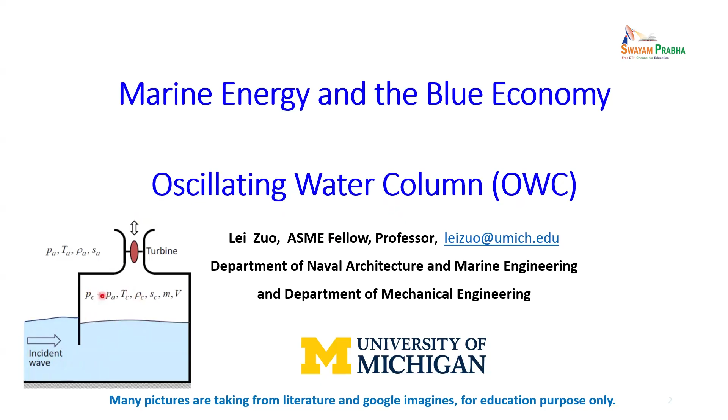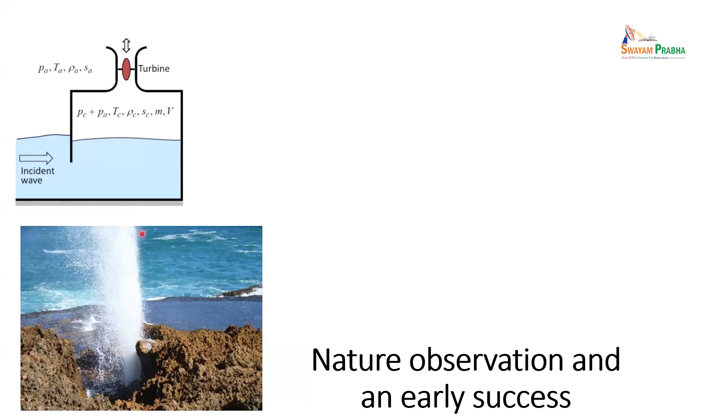That comes from nature observation. For example, in some coastal zones, a wave comes in and the water quickly comes up like that, right? So instead of getting water, you put a turbine here. Actually that is also one of the first applications: in the 1940s a Japanese researcher used that to power a lighthouse. Take a look at how it works here.

The wave moves up and down, right? Then it drives the air out, in that direction. Follow my mouse. If this water surface moves down, this valve opens, and air goes through here. No matter whether the water surface moves up or down, the air goes through the turbine in one direction. This way, reliability has been greatly increased. They can use this as a lighthouse power provider

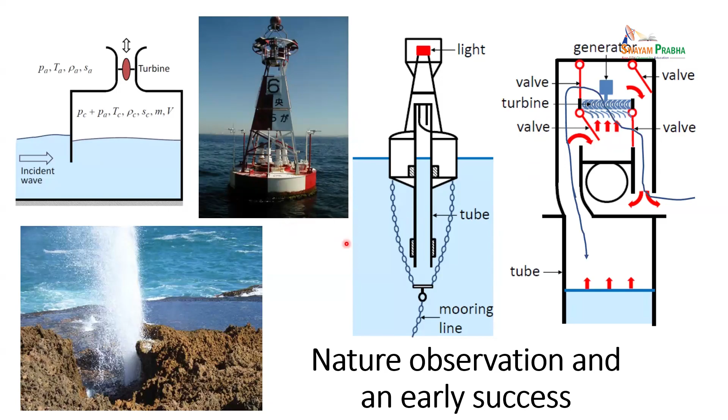or to provide a navigation mark. Such an idea is good, but there is a problem. The problem is you have to open and close the valve, and reliability is not that high. So that is one type of oscillating water column. I already showed how the wave goes through.

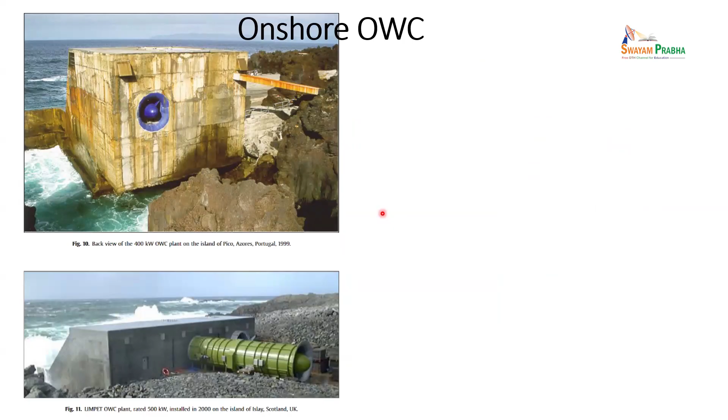This is another one. The top one is Professor Falcão's design, in operation since 1999, a 400 kilowatt wave energy converter. It also has a turbine. Similar principle: the wave surface moves up and down, then drives the turbine. And here, this is one device in the UK. It has operated since 2000 and produces 500 kilowatts.

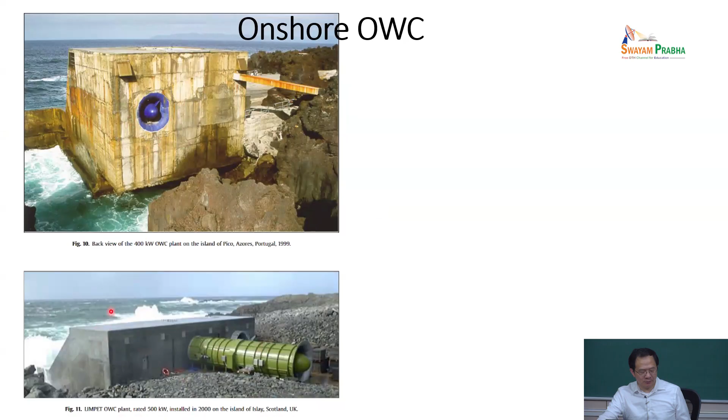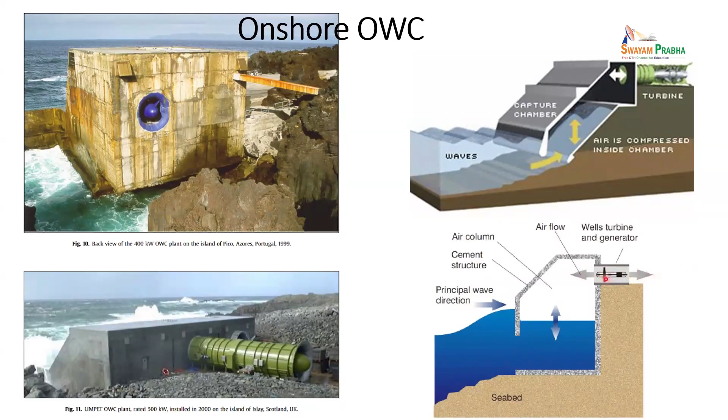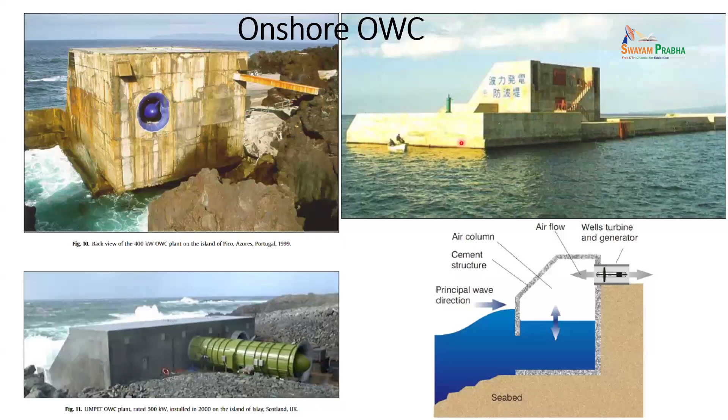The principle is the same, right? The wave comes in and the surface moves up and down, driving the turbine. However, different from what we just saw, the air goes through the turbine in two directions. This is another one in Japan; it's a combination of a breakwater and a wave energy converter. In principle, it is the same.

Can you imagine what kind of turbine it is? You will have a regular fan, right? Air in one direction, air out another direction. But for this turbine, it's special, it's a Wells turbine.

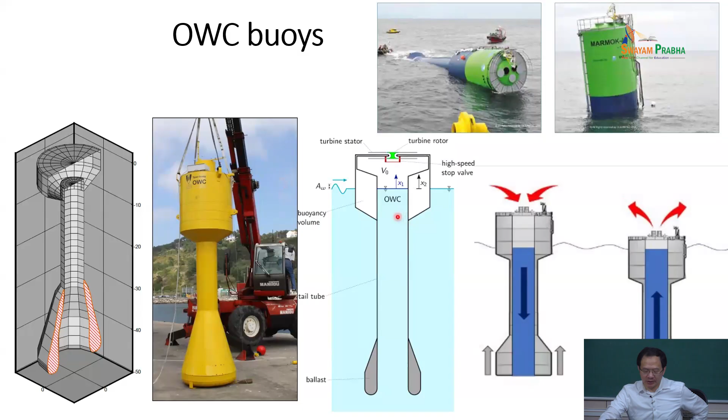So this is an oscillating water column. It can be land-based or floating. This shows the principle. So the buoyancy chamber is here, this is more like a heavy mass, and then the air moves in and out. There's a turbine here.

It's like this way. When the air moves up the dashed line, it drives the turbine. When the air moves down, it drives the turbine too. Now the turbine rotates in one direction.

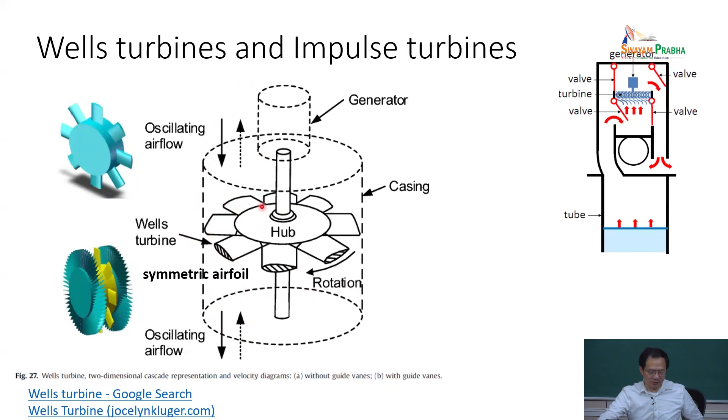It's like that, this shape is important. You just think of it that way. Air in and out generates thrust. Air out generates thrust in one direction, air in generates thrust in the same direction.

Another thing is the impulse turbine, and this is the impulse turbine, and you can say there's a guide. When the air goes in one direction like this way, you can imagine it that way. In that way it generates thrust, you can say it pushes in that direction. Another direction will be similar and also generate thrust in the same direction.

So in that way, no matter air in and out, the generator always rotates in one direction, like here. So this Wells turbine design is almost the same, and in Spain, in the Basque country in the north side, it's called a country, it's more like a semi-independent place, part of Spain. So it's like that, the air in and out drives the generator.

So about that, when they implement that, they put an air muffler. Otherwise it generates noise. They put huge air mufflers there, and the noise is reduced.

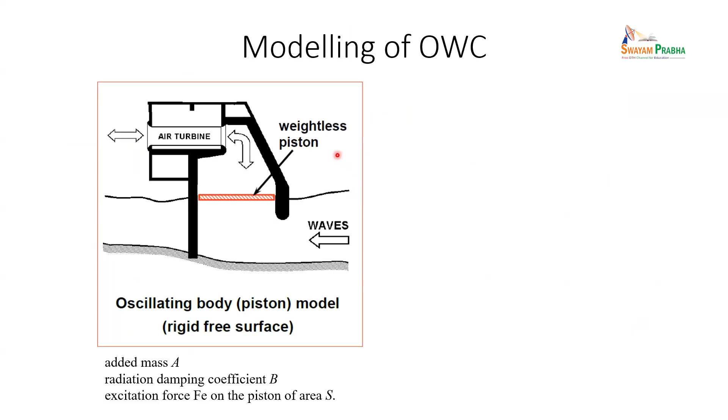So now, how to model this system? There are two ways to model the system. One way is to use the concept we already learned. They call it a weightless piston. You just imagine that you have a piston here, and the piston moves up and down.

When the piston moves up and down, that is similar to the oscillating body system we learned. We have the constant added mass, which is the water surrounding that. We also have radiation damping, when this mass moves up and down, it generates waves, this concept. So then it will also have an excitation force. Such kind of modeling we already learned, then we can model the system.

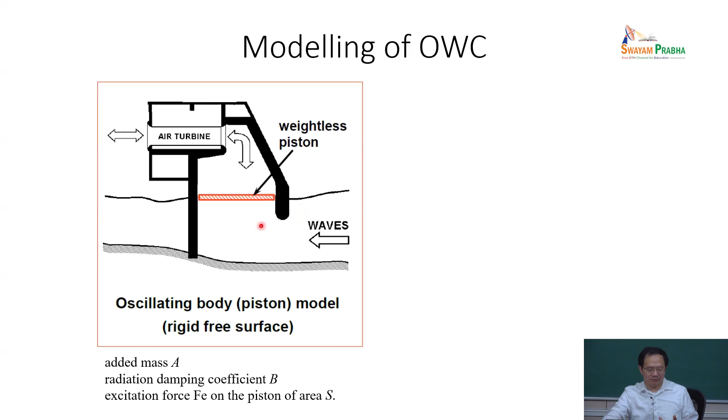And another way to model that is using the so-called uniform air pressure model.

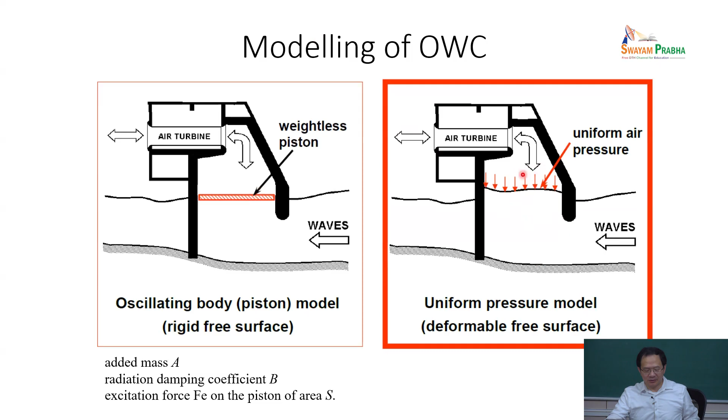In this chamber, you move up and down, the air pressure will be the same. So in that way, the surface doesn't need to be rigid, right? So for this aero analysis, you need an aerodynamics modeling for this.

As I promised, I'm going to skip this detailed analysis and highlight a couple of points. This modeling is taken from Professor Falcão's textbook, including this figure. I'll tell you the assumptions first, then I won't go through the equations.

So you have pressure, temperature, density, and the turbine surface area. Then you have pressure plus pressure change, temperature and density, this surface area. You have the mass flow rate, right? You have volume. So then I skip this part directly.

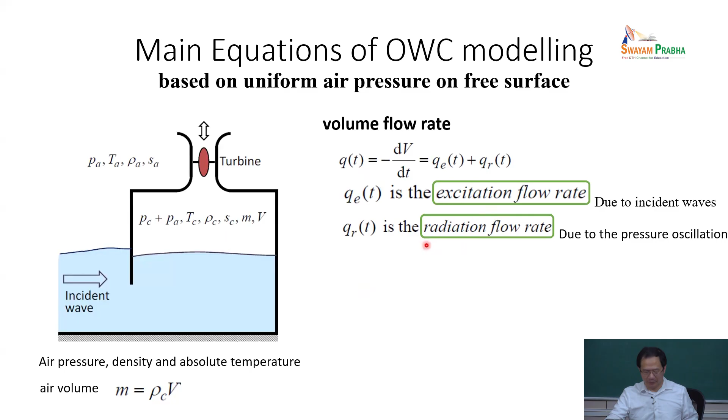There are quite a few pages here, so we can get a chance to cover more content. They take the flow rate into excitation flow rate and radiation flow rate. So then write the mass flow rate relationship, and eventually make some assumptions using the ideal gas condition.

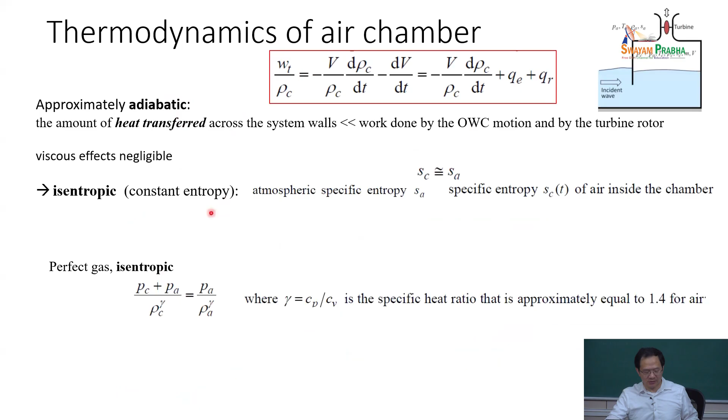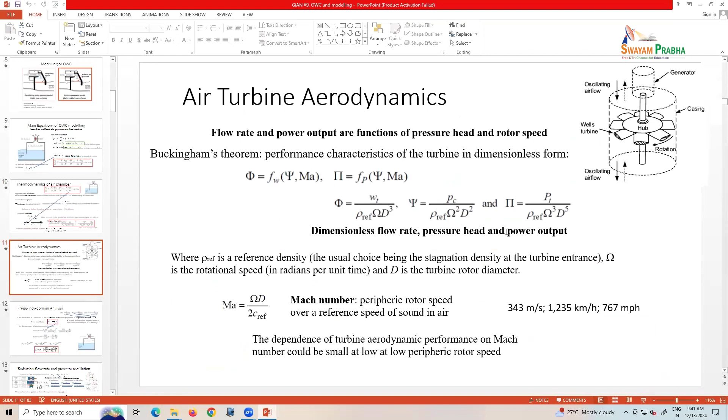So this air turbine aerodynamics you normalize based on the rotation speed, pressure, and power output. It's normalized. So the important part I want to point out is this: to understand the important conclusion here, I will introduce the flow rate and pressure relationship, which is usually proportional with some coefficients.

The coefficients can be complex numbers. What does a complex number mean here? The flow rate and pressure have a phase difference, right? There's a real part and imaginary part. The real part we call the conductance, the imaginary part we call the susceptance. This is similar to what we learned in control systems with real and imaginary parts. If you have an electric circuit, you have impedance, a resistor, an inductor.

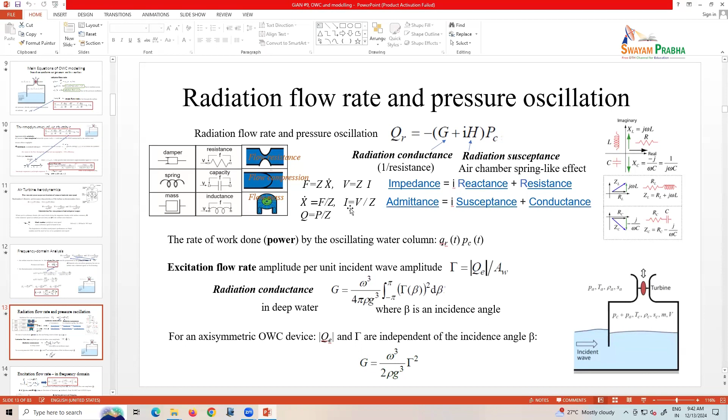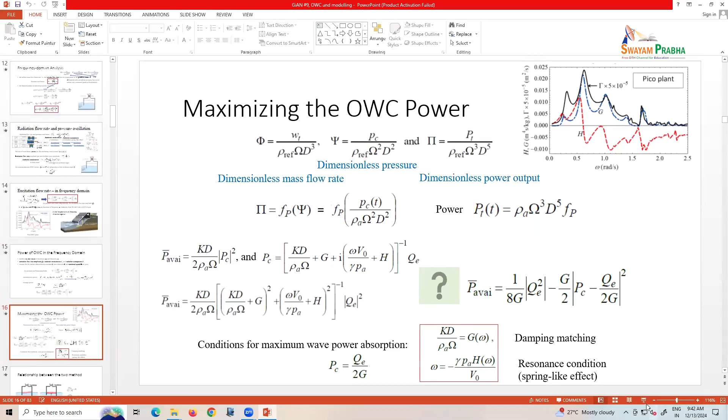So now let us discuss the physical insights here. I want to open this up: one is mass flow rate and dimensionless pressure, and power output. There's a condition to maximize the power output.

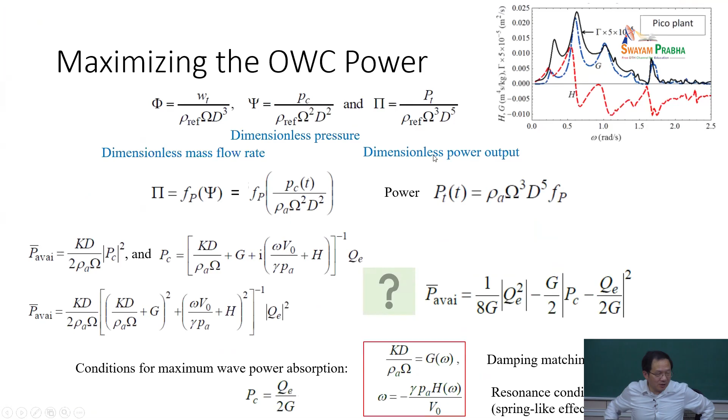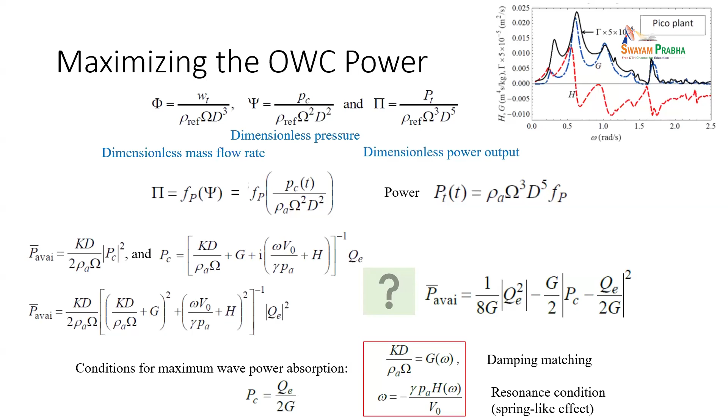There's a similar condition, like this resonance condition. Inside the chamber, there's resonance, and there's a damping condition. In principle, this is the same as what we learned in the point absorber case. You want to maximize the power output. At certain resonance, then there's a damping condition, then you can maximize the power output.

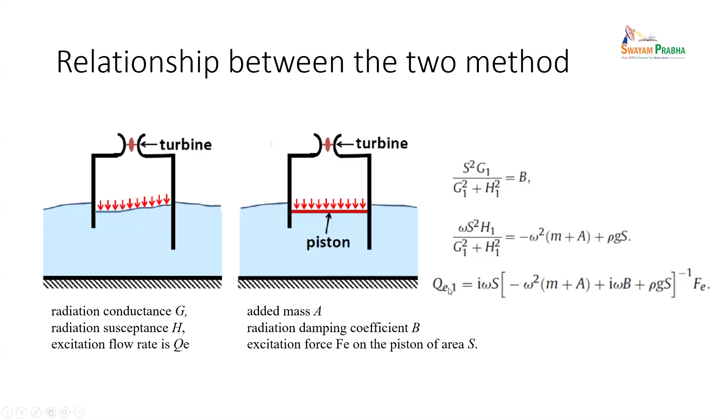So anyway, these two approaches have a relationship. Basically, this radiation damping and how it's related together—there are two ways added mass is related here, and the excitation force and the excitation flow rate. I'll skip the details, and if you have interest, I suggest you read Professor Falcão's textbook. He's an expert in this field.

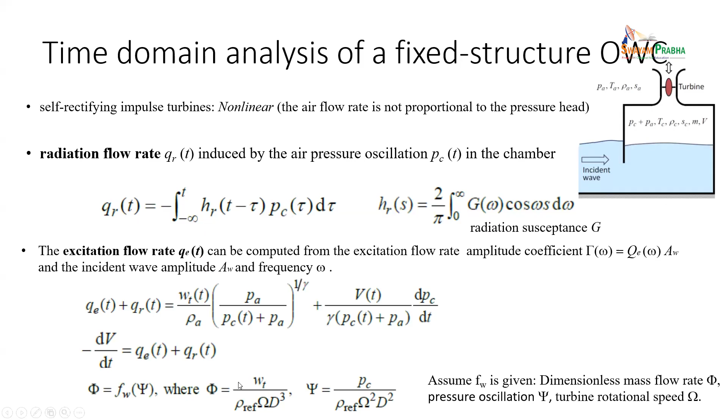So there's also time domain analysis. I'll skip these technical details—it's very interesting, the modeling part. So now, I will continue to the next topic about power takeoff.

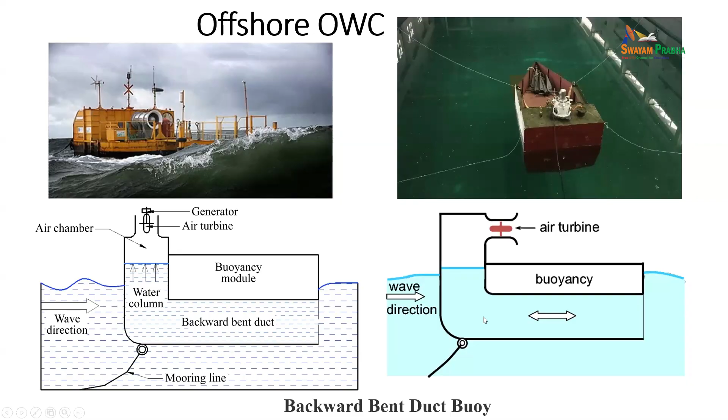So this is another design, right? Just like that, an oscillating water column—there are many types of different designs, even for the turbine. This turbine is in rotation, this is fixed, right? And there are even many different turbine designs. For example, Professor Falcão and his colleague Professor Gato in Portugal.

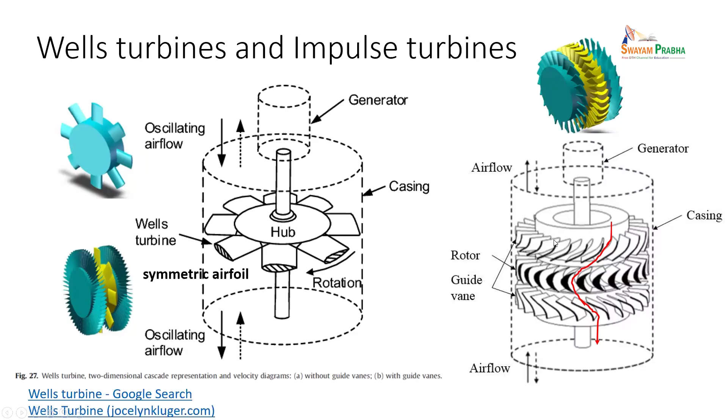They designed some active vane, so they can actively adjust—if the air goes in one direction, they adjust the vane angle dynamically and get better efficiency. So there's some active research there. We also have research on how to design this guide vane, so that it reduces the vortex in the system and improves the efficiency.